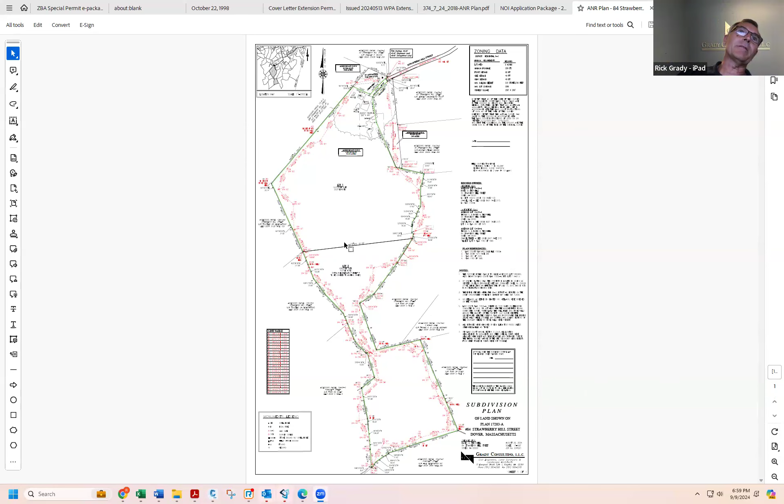Again, Rick Grady from Grady Consulting. This is for Karen Thornhill's property at 84 Strawberry Hill Street. She's got about 42.5 acres here. She would like to convey the back portion of the property to the Hale Reservation. We've been working with Land Court, as well as with Karen and her attorney, on this. Real simply, they want to divide it by this line right across the middle of the property, right here. We'll zoom in a little bit.

The existing house and outbuildings are located towards the front of the property here. That's depicted as Lot 1. There'll be 23.27 acres that will stay with the existing home of the Land Court property, as well as 2 acres of non-registered land that's also part of the same property where the house sits. The total frontage is 95.05 feet on Strawberry Hill Street. Of this, 45.40 is registered, 49.65 is unregistered. There will be no change to the existing frontage; all of the existing frontage will be maintained.

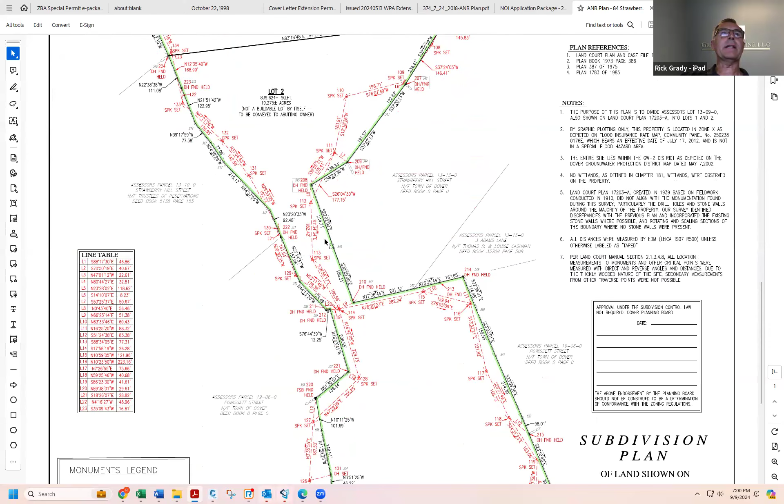The back portion that will be conveyed is about 19.275 acres, shown as Lot 2. It's not a buildable lot by itself, and the only purpose is for conveyance. You will notice the dashed lines here - we had to conduct a full traverse around the perimeter of the property in accordance with Land Court standards. That is meant to depict the measurements that we took around the full perimeter of the property. There's numerous stone walls, drill holes, other monuments around the perimeter, as well as the traverse.

This meeting is being recorded. With that, I'd be glad to answer any questions the board may have.

Okay, thank you very much. We always love to see landowners donating land to one of our open space organizations. So Karen, thank you very much for your donation to Hale. And do we have any questions before I have Jasmine go through the process?

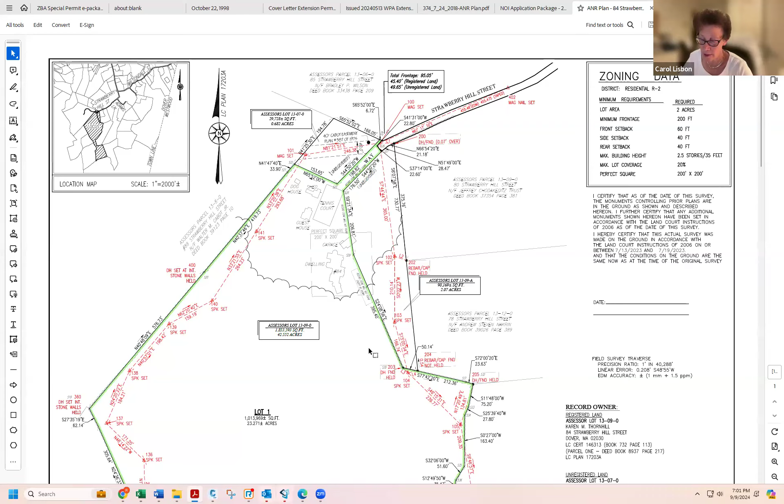That lot will consist of 624,000 square feet - oh, I'm sorry, that's what they're separating out. They will still have over 1 million square feet left on their residential lot, correct - so 1,013,969 square feet. And it meets all the setback requirements, all of the dimensional requirements, except for the frontage.

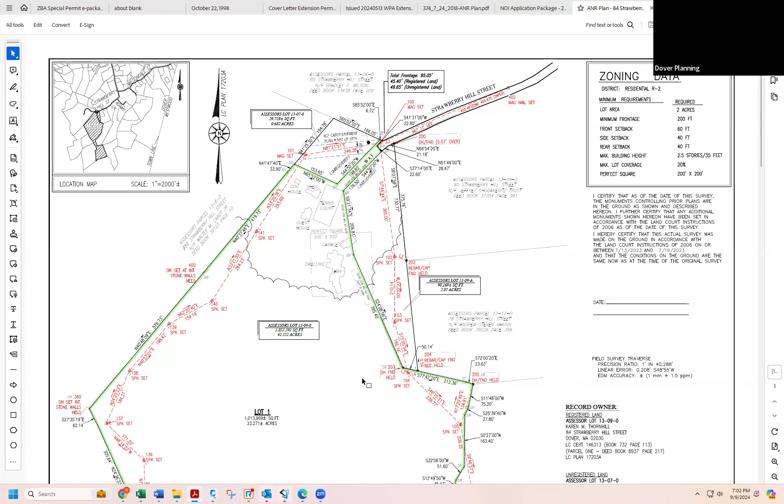The rear lot that they're separating out will be 839,624 square feet, which they will then be transferring to an abutting owner. And there is a note on the plan that says it is not a buildable lot as it is.

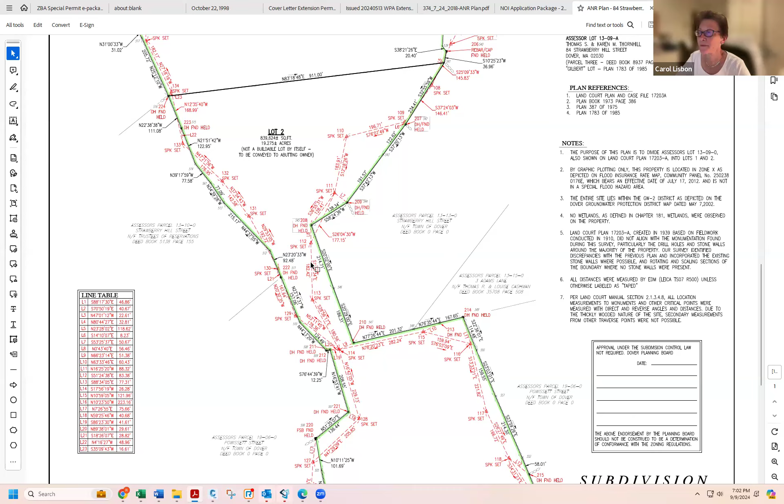Okay, thank you. Do we have any questions from planning board members? I'm sorry, it's been conveyed ahead to Hale, is that right?

Can you please just outline who the abutters are on the portions of the parcel here, please? I guess where's Hale on this? Oh sure, can you see that okay, or do you want me to zoom in a little further? I think I'm good, thank you.

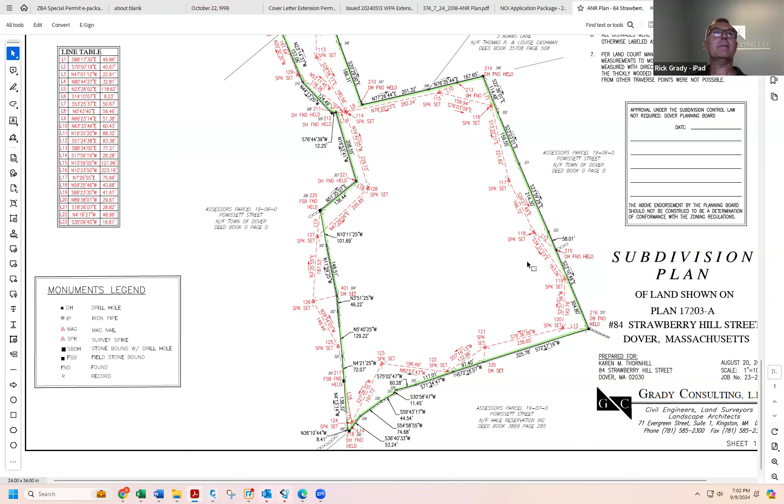Hale Reservation is to the rear here. We've got Town of Dover on both sides here. Cashman's here, although a portion of theirs was conveyed just this past year that we were before the board on. Town of Dover, Trustees of Reservations over on the left here. Trustees of Reservations again on the left here. That Town of Dover property wraps up to here. And then we start getting into the landowners here.

Nakrin at 78 Strawberry Hill. 80 Strawberry Hill Street here. 89 to the left. And 85 somewhat across the street or across the easement here.

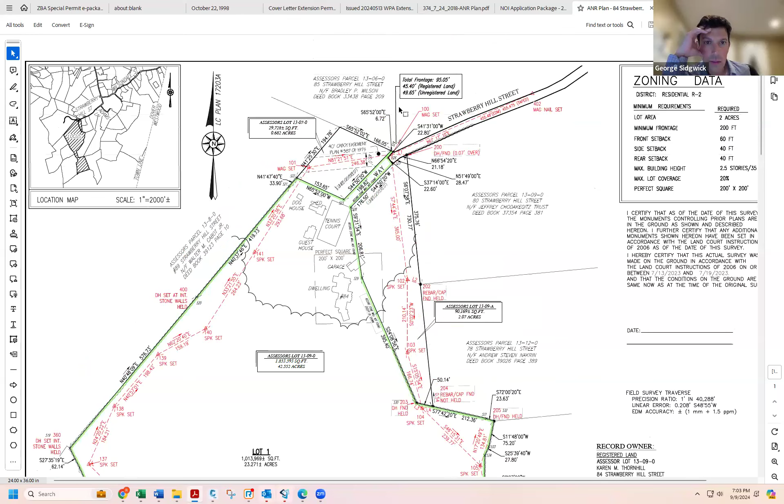Got it, so George, thank you. Back at our first meeting in January of 2024, Mr. Cashman went through with an ANR as well and donated land in this area as well.

Seems familiar, yeah. Do I have any comments or questions from Brad Wilson or Vera abutters? I think I'm all set. Okay, thank you. Vera, are you all set? Okay, not hearing anything from that.

I have one quick question. I just wanted to clarify and make sure that I understand—are there any conservation restrictions or anything like that placed on this land at this time? Or, I mean, technically it could be a buildable lot, but it's not being conveyed as one right now?

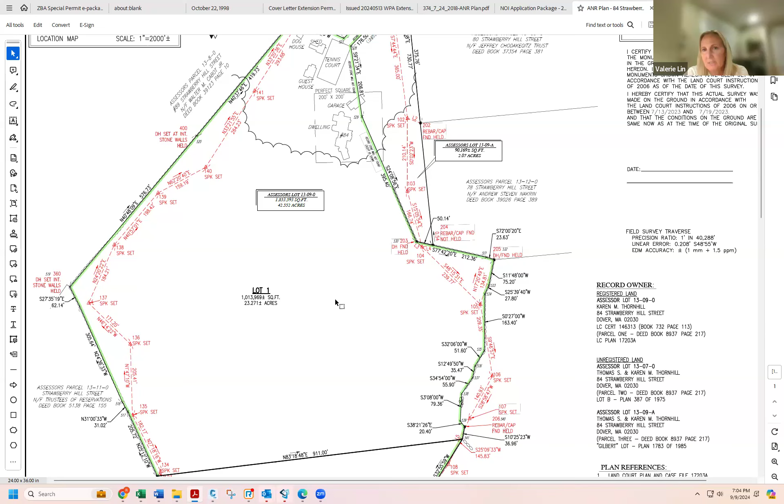Correct, although lot 2 by itself really couldn't be a buildable lot because it wouldn't have frontage. No frontage, right? Yeah, there's no access. No other restrictions on the property currently, though. Okay, thank you.

And as we do, I did have our easement and trail expert, Amy Moot, take a look at that as well. And she obviously feels very appreciative of the Thornhills donation as well.

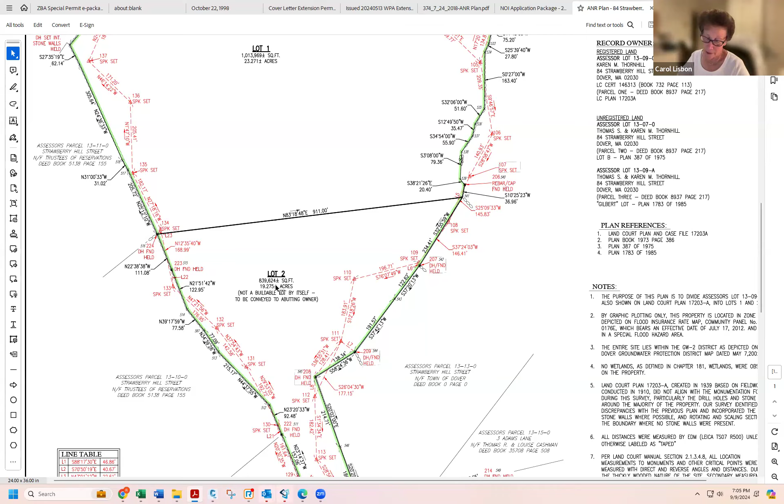So, any further questions? In that case, I make a motion to approve the ANR application for 84 Strawberry Hill Street. Do I hear a second? Second. Great, thank you. I will now take a roll call vote.

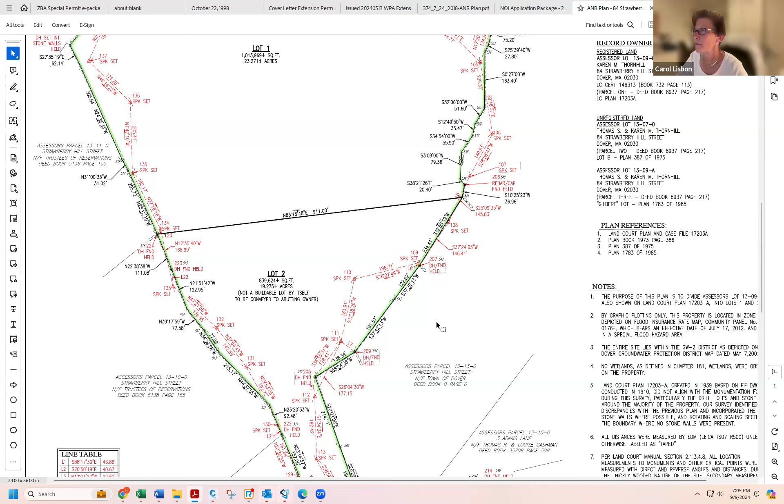Okay, now we'll go on to the second item on our agenda, which is the amendment to the DPW salt shed decision that we had approved earlier this year. And who do we have here for this application?

Good evening, everyone. My name's Jesse O'Donnell. I'm an engineer with Weston and Sampson representing the DPW tonight, specifically Kevin McCabe, the DPW director.

Okay, and is Bobby Tosi on? I don't see him. No, they just left, I don't have him on. Okay. Kevin's out of town, so Bobby was going to, at least as of late morning, was going to fill in. But I think we'll get started.

So Jesse, I'm going to turn it over to you to review. Sure, thank you very much. Let me just get my screen on here. Can everyone see that fine? Yes. Great. All right, so as Ms. Chair outlined, we are looking to request to modify the previously approved site plan approval from May 1st of earlier this year.

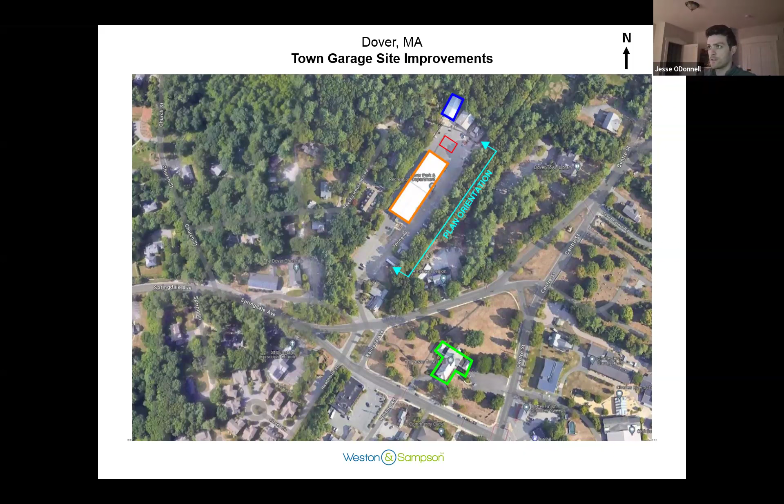I'll go over a few of the features. In orange is the actual double-walled split steel tank, about a 10,000 plus or minus gallon tank with gasoline and diesel fuel for town vehicles. We would have a single-sided vehicle fueling configuration, so vehicles will be pulling up to the left side of that orange rectangle and fueling.

Then we have a concrete fueling pad with bollard protection. The fueling pad that vehicles line up at to fuel will be concrete. We'll have bollards protecting all of the fueling appurtenances so they don't get damaged by any errant circulation by vehicles. We also have a diesel exhaust fluid tote, shown in blue, to house the diesel exhaust fluid needed for some of the town's vehicles.

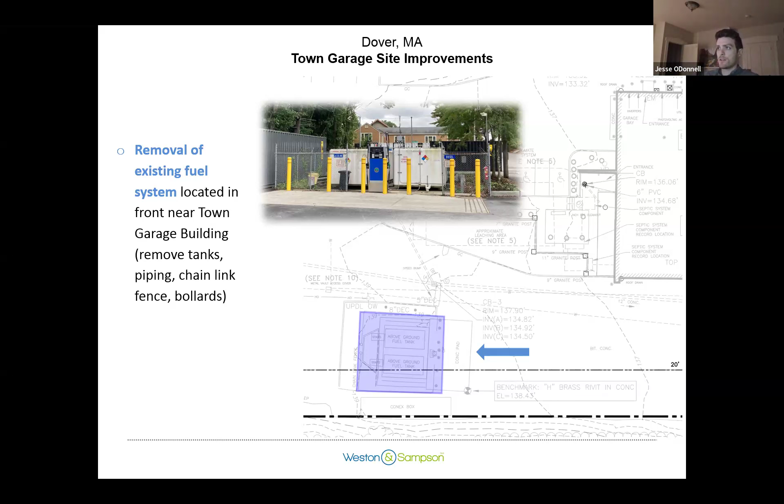Yes, thank you, that's a great question and something I should have mentioned at the start. You're right, this existing fuel system we're looking at here is above ground, and the proposed one is also proposed to be an above ground double wall steel tank with the canopy and the diesel exhaust fluid tote and bollards. So yes, all above ground.

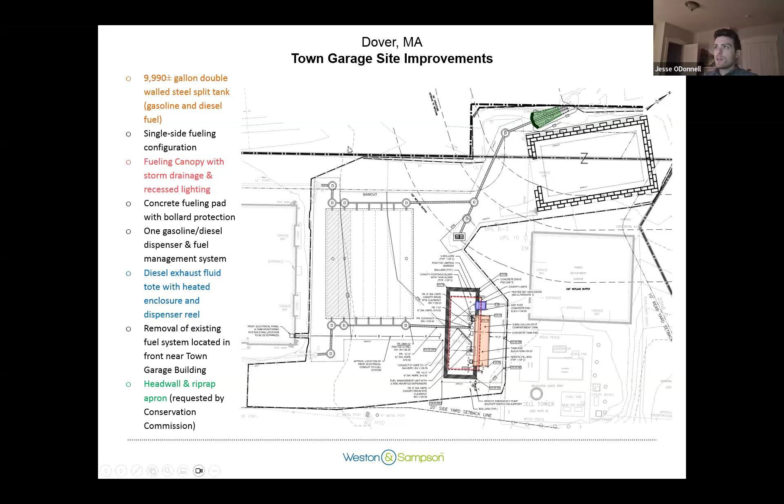And can you remind me why is it that the existing one is being replaced? What's the rationale for this? Is it capacity or something else? That's another good question, and we looked into the warranty.

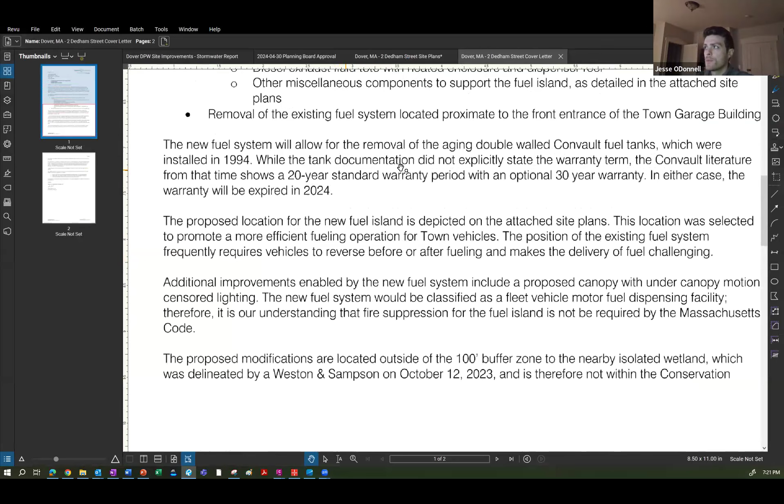Here is the letter that we submitted to the planning board. I think I just want to use the language we use directly in here. This is gonna make you feel old. Come on, I think this is the language we're looking for to answer the question.

So while the tank documentation for the existing tanks did not explicitly state the warranty term, the literature for those existing Convault tanks shows a 20-year warranty period. So in either case, whenever that was established, the warranty will have expired by 2024, because the tanks were installed in 1994.

So does that warranty, did I read that correctly, that it expired? It says an optional 30-year warranty as well? Yeah, so from 1994, there was an optional 30-year warranty. So if it was the 30-year, that would be expiring this year, right?

So, okay. So is the reason why this is all taking place - and Carol, if I'm getting too far afield just tell me if it's outside the purview - but is this because of an age issue that we're replacing this tank? Or is it a capacity issue? Or what's the motive to spend this money?

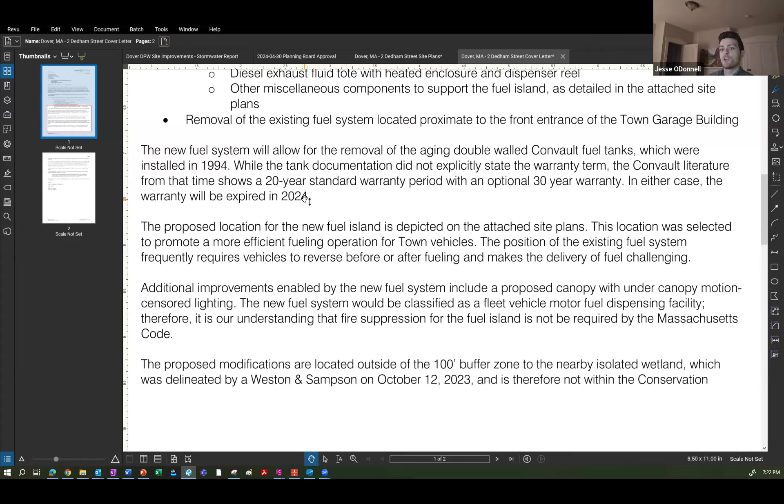Primarily it's an age issue, an age and safety issue. And to supplement that, some of the justification is the configuration and added convenience of the location of the newly proposed fuel system. But the primary reason we're looking to replace this is due to the age.

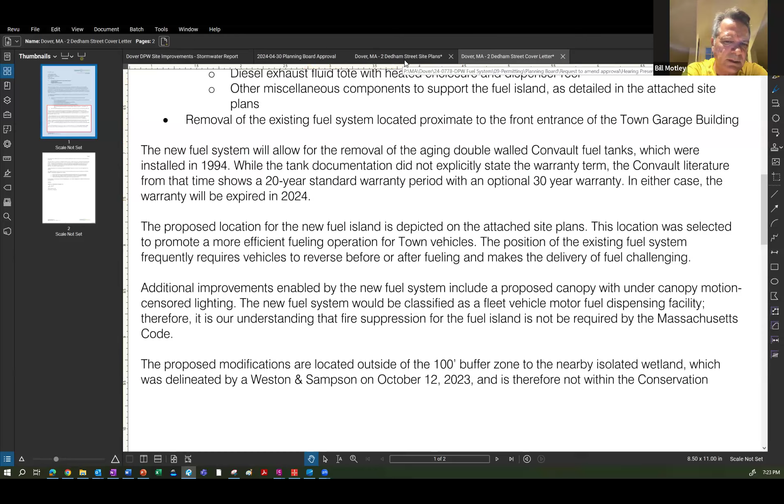And my last question is that the new location just seems to be in and amongst other buildings. In some ways, to bring a big truck into that area where I see the new salt shed and the existing town garage - is that rectangular section to the right of that area above or below ground?

That's a below ground structure? Yeah, that's a really good question. So to get a lay of the land, this is an existing Parks Department garage where they store a lot of their equipment and appurtenances. Right here is a wood fence that houses a cell tower in the middle, this circular icon. There are a few very small concrete structures that serve various uses.

And our proposed fueling system is the area I'm circling right now, kind of in the middle of this open paved area. So vehicles generally would come in from the front along the right side of the main DPW building and pull up right here. Then they could either leave by doing a 180 and coming from where they left, or pull out straight and leave via the northerly side of the plant.

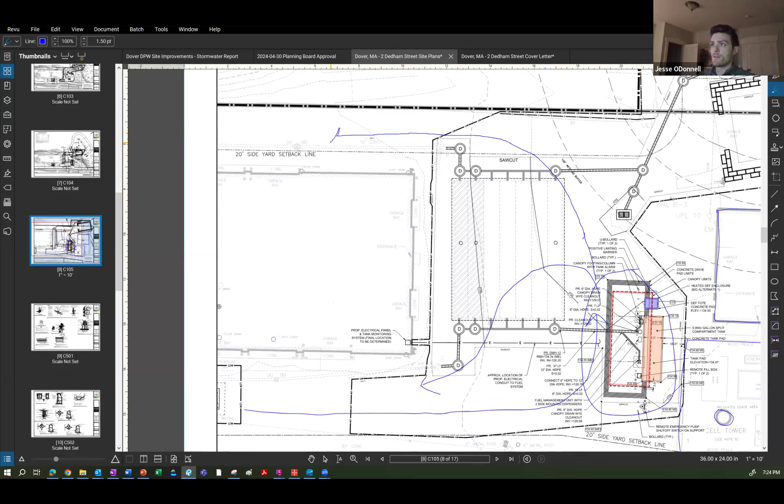Okay, and that canopy area you were alluding to, could you tell me one more time where the canopy area is? Yeah, the canopy is what's in red here. The tank is in orange, the canopy is in red, and the limits of the concrete pad are generally what I'm highlighting in green right now.

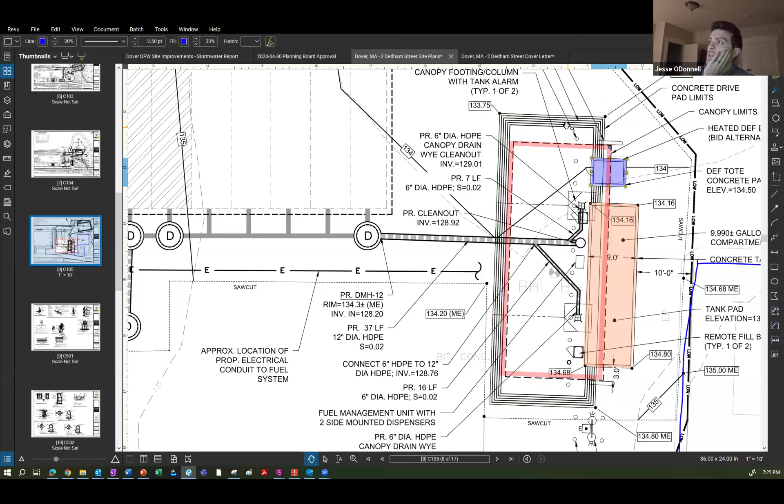What is the capacity of fuel between diesel and regular gas for the new tank compared to the existing tank? I believe the new tank has about a 60-40 split for regular fuel to diesel. For the existing tank I'm not exactly sure what that split was. We did a feasibility report for the DPW at the start of this project and probably have that information there - if you'd like, I could take a few minutes to access it.

I'm primarily interested in just knowing, are we increasing the capacity of fuel storage with this new tank? Obviously age is a consideration for replacing the old one, but what are the capacities of the existing versus the new?

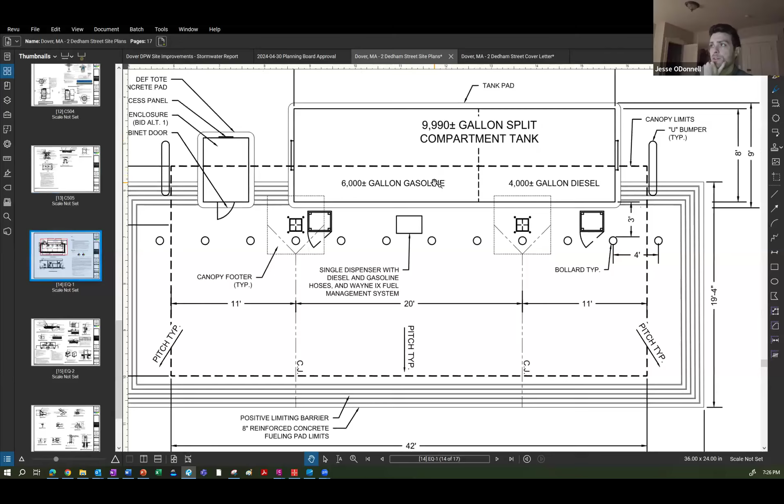Let me see if we have that on our plan. Our industrial engineers designed the equipment plans here. So to answer your question about the new tanks, it's 6,000 gallons of gasoline, 4,000 gallons of diesel. As for the existing, if you bear with me, I could open up our feasibility report and it will likely have that information so we can compare.

Jasmine, could you just double check to make sure Bobby isn't waiting? There's no one in the waiting room. Okay, okay, yeah, okie doke. Maybe I'll text him.

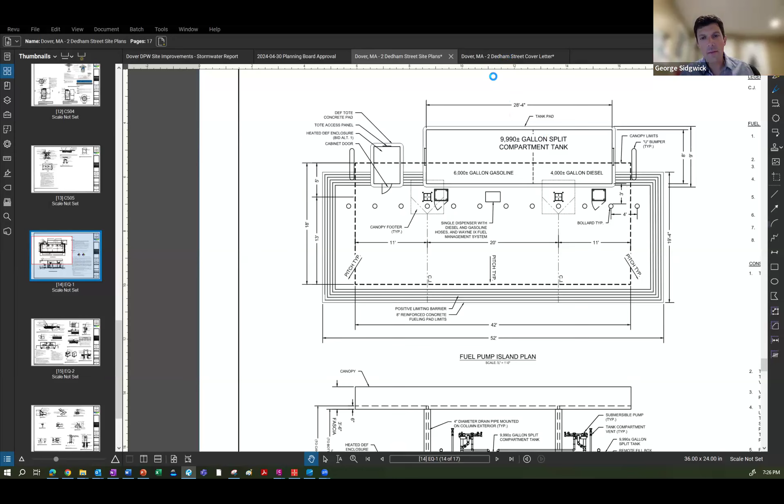Well, Jesse's looking. George, did you have some questions as well? No, Bill hit mine. My main one was around capacity differential between the existing and the new one, and sort of what that means.

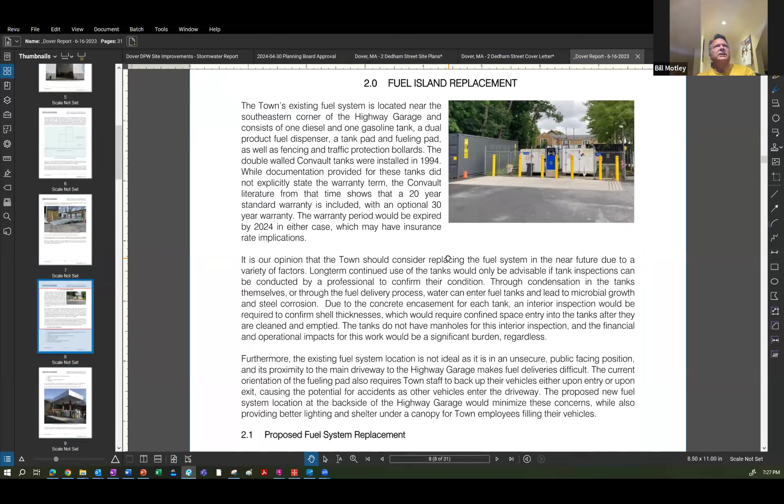And Carol, are you not aware of the cost of building this new fuel system? Was this something that wasn't brought before the town meeting? So do we not know how this has been funded either? As Jesse said, the other funds were ARPA.

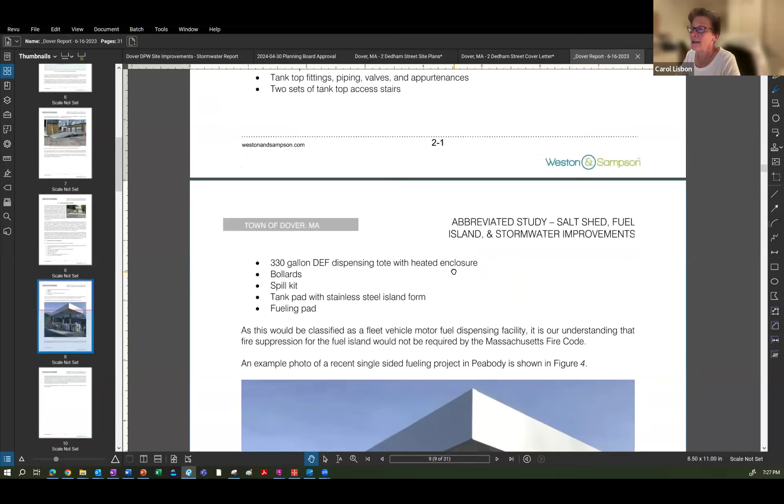I happened to be in the office with Jasmine today when Bobby Tosi stopped by, and he was going to be signing on tonight. I asked him if he could answer my two questions, so it's unfortunate he's not here. I just texted his cell phone, so I don't know - maybe he's been called out on a fire or an EMT call.

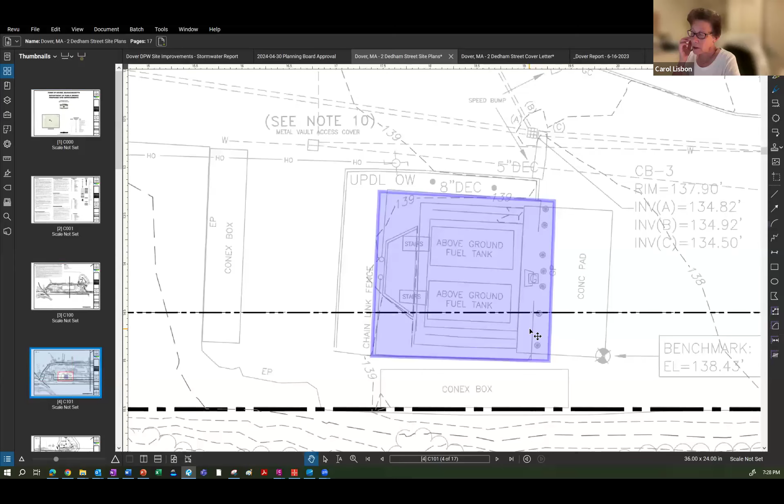Okay, but if they're not using ARPA funds, meaning they had some left over - the ARPA funds have been designated for usage by the Board of Selectmen over the last couple of years. I see, okay, so there might be ARPA funds left to do this. It wasn't on the capital budget, I don't believe, for this year, so it might be that he just has money. Well, it would have had to be ARPA funds because the cost of this is obviously more than $10,000, so if he was going to do this, it would have had to be a capital budget item. Yeah, and it wasn't.

Kevin has been spending the time since he came on board to the town of Dover upgrading all the equipment and buildings and everything else. But I too was curious about the cost, and I just don't know. I'm assuming that Mike Blanchard, Kevin's boss and our town administrator, knows what Kevin is doing with this.

And to your point before, it's not something we legally have as part of our decision-making process, but I think as we did with the last A&R application, asking what are you doing with lot 2, it's nice for us to see the whole picture.

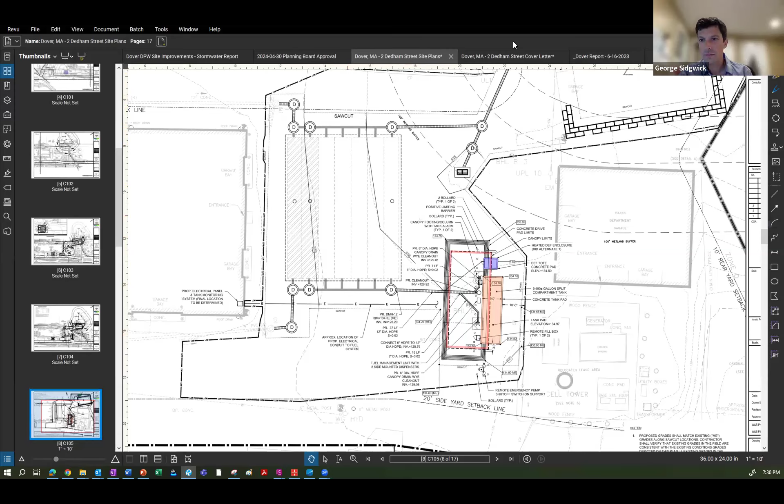No, thanks, it's just an interesting one to me — you could have a tank as big as you'd like on your own home and not need it, but you do if it's public, I guess. Well, it's interesting, right? Because 10,000 gallons is still 10,000 gallons, and who cares who's using it?

I apologize, Carol, but Jesse, I assume there's some sort of retaining wall around this fuel storage. He may have touched upon that and I just missed it in his overview, but I assume that's the case.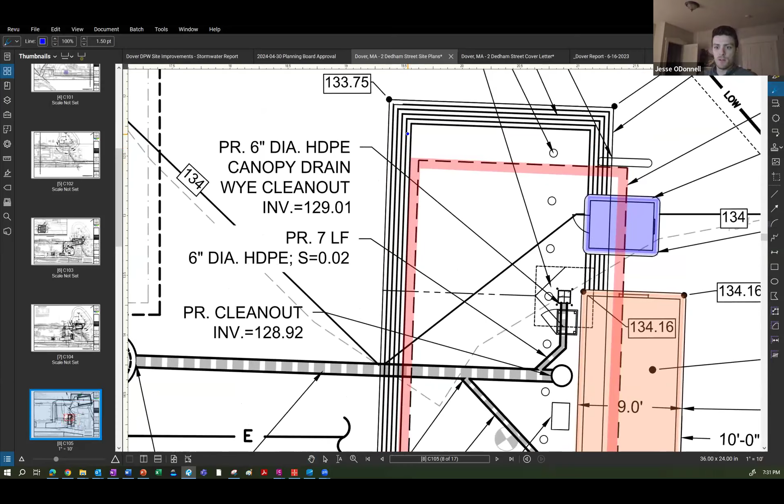Yes, the tanks are double walled — that second steel wall is a containment wall in the event of any spills. Then a second layer of added defense are these positive limiting barriers, which are all these grooves in the concrete that you'd see at a typical fueling station, indicated by these lines here.

That gives some additional surface area to contain fuel. I'd like to go back to the bigger picture of the lot, the whole site — the cell tower, down in the bottom right, requires maintenance. We have an expectation that shortly we'll be getting an application for more carrier involvement there, so I want to make sure someone has taken a look at access to that compound with the fence.

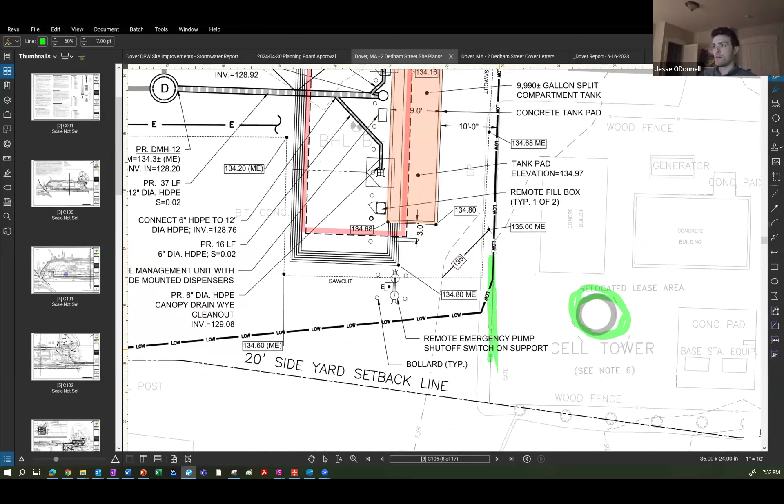Yeah, we had a call with Kevin a few weeks ago to identify where the gate is for this enclosure, which is on the planned southerly side of this. We also made sure to maintain a 10-foot dimension between the edge of our tank pad and the fence, for any vehicles should they need it for plowing or other access purposes to get around the back of this. So that's the layout we've considered with respect to those items.

So Jesse, do you know when they come to the cell tower to do work, where do they park their trucks? I've walked through that area before and they tend to park along that front fence line where the planned fuel tank is. So I'm curious, is there still room for them to park anywhere?

I'm not sure about the operations or logistics, but if they park along this area, there's enough room for any vehicle, though not enough room for two vehicles side by side. So if a vehicle was maintaining infrastructure inside the cell tower area and parked where I'm indicating in green, they'd be restricting access through this pathway while parked. Those trucks tend to be like the larger equipment trucks you'd see for Verizon.

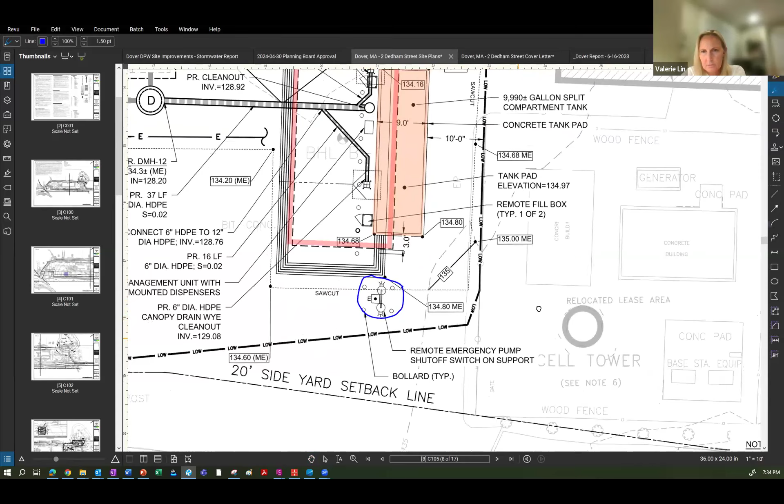It looks like there's a remote emergency pump shutoff switch just in front of where you said one of the openings to the cell tower area is. Correct, yeah, just surrounded by a few bollards. These circles surrounding it are 4 bollards.

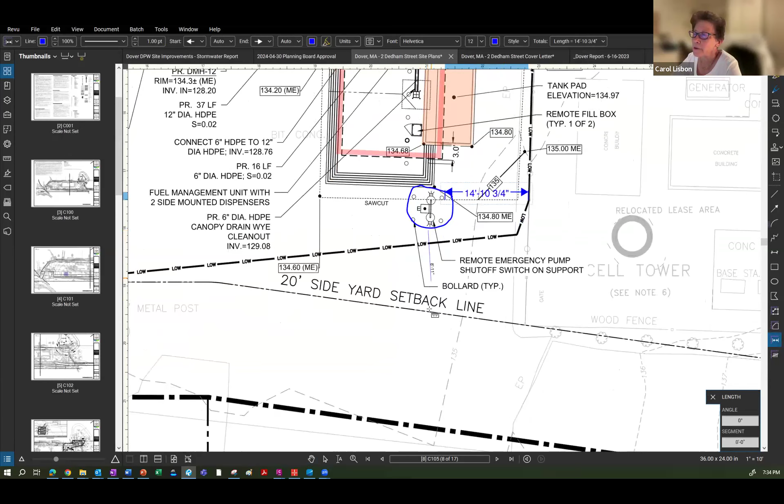So if they were going to park in that area, if you're facing it, it would be the south area. If you're a big truck coming in from the left, and for some reason you need to get to the northern part but can't go between, whether it's snow or whatever, between the back of the garage and the top of the canopy area, and you were going to go around the back of the fuel tank, and you've got this shutoff switch there—where do you go? North of the shutoff switch or south of it to come around?

Let me see if I can answer that by illustrating here. This area I'm highlighting in green—outside of it is all open pavement, open for vehicles to traverse throughout the site. So if someone wanted to drive in here, they could drive up and work their way through as I'm showing. The tightest portion is this 10-foot dimension right here, that's the bottleneck, but everywhere else there's much more space for vehicles to maneuver around the site.

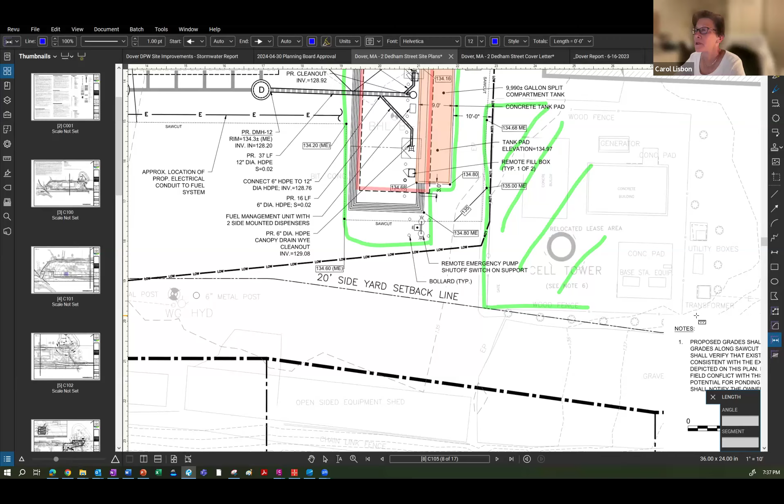Jesse, I'm putting you on the spot since no one from DPW is here, but do you feel that in your conversations with Kevin, the issues we've raised have been considered and that this design is sufficient? I do, yeah. And with respect to the funding, it does appear Kevin's had conversations, and I think we'd be quickly able to answer that question.

With respect to that, I jotted down a few questions. Mr. Motley had a good question about whether there's an increase, decrease, or stagnation in capacity relative to the existing tanks—we could find the size of these existing tanks to answer that in short order. Regarding electric or fire code issues, what size tank would necessitate fire protection, or if that's even a variable that does, we could answer that too. We've done our due diligence to site this fuel system in a way that works with the site and local regulations, but we can answer these more precise questions once Kevin returns this week.

Jesse, I have a couple more questions. The canopy—how high is it? And have you measured the height of the largest truck DPW has to ensure it will fit under there? And if they purchase a taller truck in the future, will that be okay? Great question, let me go to the plan that shows the canopy detailing here.

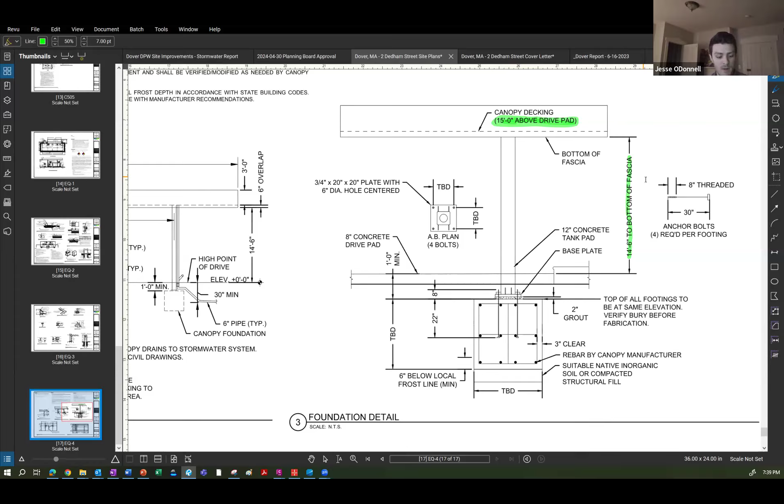Yeah, I asked because in the past there were renovations done to the firehouse, and shortly after those renovations they purchased a new truck which did not fit through the doors with enough space to safely get it in and out. So then they had to make more renovations. That was a fun meeting. Yeah, wow. So we'll certainly talk about that. I'll bring this up to Kevin.

I'm also thinking a lot of those trucks haul things, right? So sometimes the things they're hauling might stick up higher than the height of the truck itself, so we need to make sure there's some excess space above them. Secondly, if there were to be a spill, I know Bill you started questioning this...

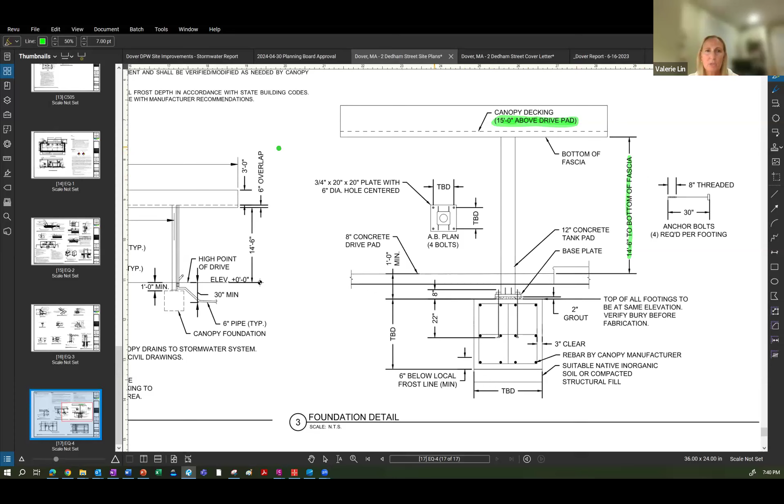If there were to be a spill, can you go back to the original plan we're looking at? What is the flow of where the gasoline would flow to? Yes, let's go over that.

It's a good question, and it kind of marries up with the stormwater design for the site. So the tank is in orange. If there were to be a spill in the tank, let's go from the most remote point of the tank relative to our stormwater infrastructure.

If there was a puncture, in the almost near impossible event that something would puncture both walls and water were to flow out from this location in green, it would follow a flow path like this. It would flow this way, and then it would eventually start to flow this way, into this new double grated catch basin, and then through this water quality treatment structure, which has been sized to remove pollutants and impurities in stormwater and any sort of spills before discharge to the wetlands.

I don't think it would remove gasoline though, that pathway. Yeah, that's a good point. These treatment units are mainly for physical debris, deposit of sediment and materials like that. The gasoline itself, I don't think they're rated to have any appreciable removal of gasoline.

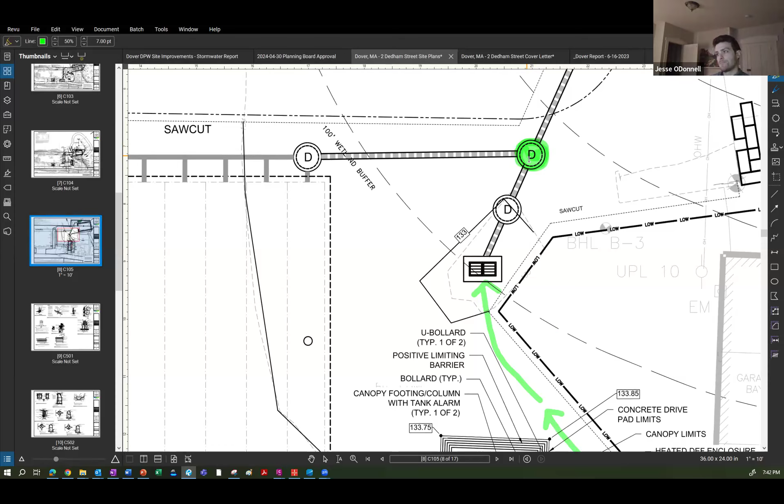But there is a sump in this catch basin, so there are some features that would help in the event of a spill. But in the event of a spill, we would need to certainly conform to any spill response procedures that are part of our plan.

The spill that happened in Dover was not that anything was punctured. It was that gas tanks were being refilled by a big tanker, and the gas spilled out during that filling process. So that's why I'm asking, where on here would a tanker drive up to fill these tanks, where do they fill them?

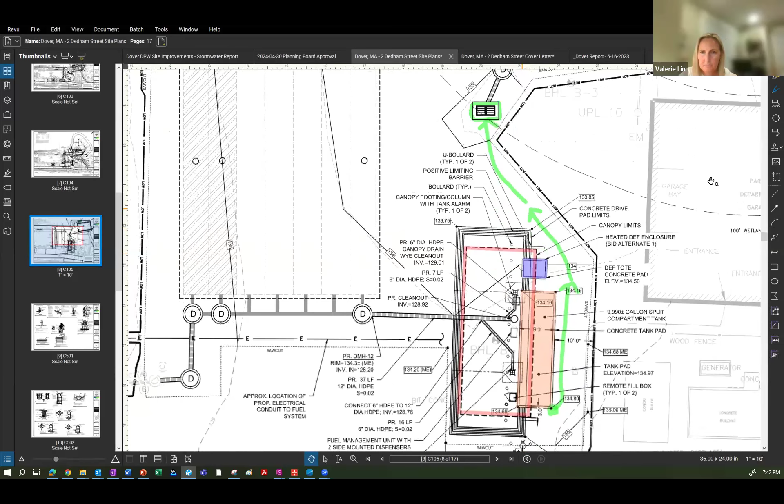Yes, so let's see, a tanker would fill up right here. The dispenser, I'm marking the dispenser right now. So they would fuel up at the dispenser right there and park right alongside the bollards right here. Okay.

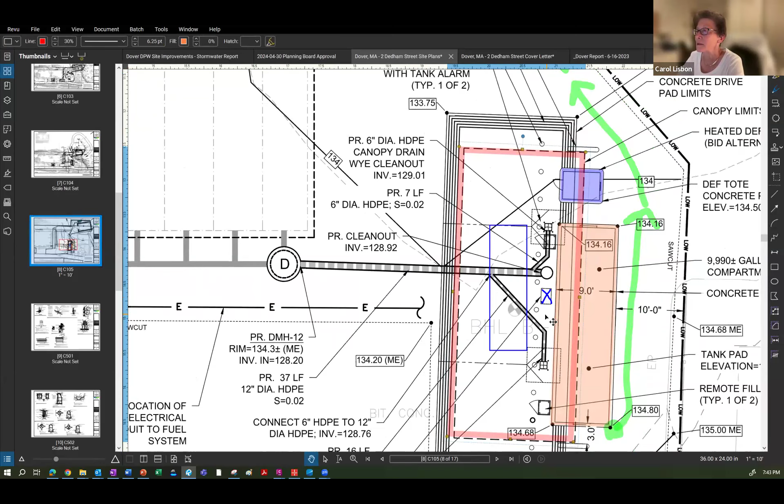Jesse, when this was reviewed with the Conservation Commission, was there any discussion from the Commission about this whole issue of the oil spill and the stormwater plan not having filters that impact gasoline? This project, this amendment or modification, is outside of the conservation jurisdiction. So this improvement is not something that is within the conservation's jurisdiction.

So from a stormwater perspective or a spill response perspective, I'd invite any commentary or feedback that you may have. At which point does the DEP get involved with these types of facilities or approvals?

They certainly do, and I think there's certain size triggers. I am not familiar with the DEP code as it relates to these more industrial components. My expertise is more in site civil layout and engineering of utilities, not specifically fueling systems. We have staff at Weston and Sampson who have assisted with this project that would be able to answer that question. Let me jot that down, and I can follow up to provide an answer. Thanks.

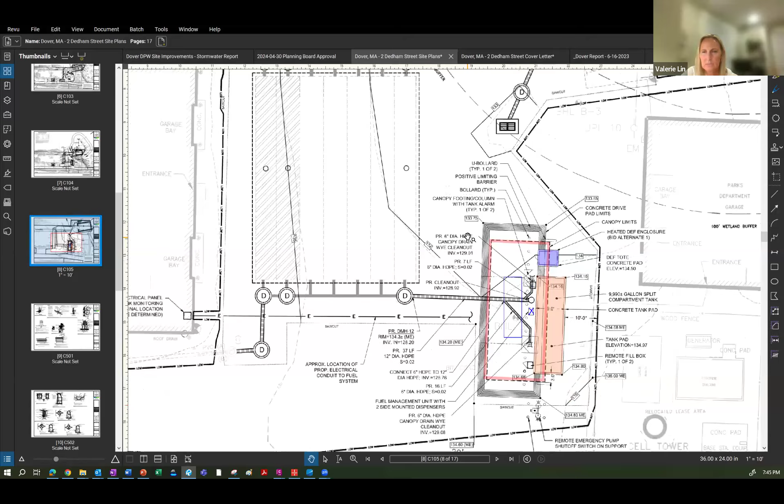And one other question, which you might have on here, maybe I just missed it, but there's also a water protection zone in that area, I believe. I don't know if you were to zoom out, if you're able to see where that zone is. It would be behind the cell tower, and behind the salt shed, I think. Yeah, there is a wetland adjacent to the salt shed. Let me highlight the edge of the wetland, generally as I'm highlighting in green, and it's an expansive wetland that goes back to the rear portion of the site. So that's where the wetland system is. Is that what you're referring to?

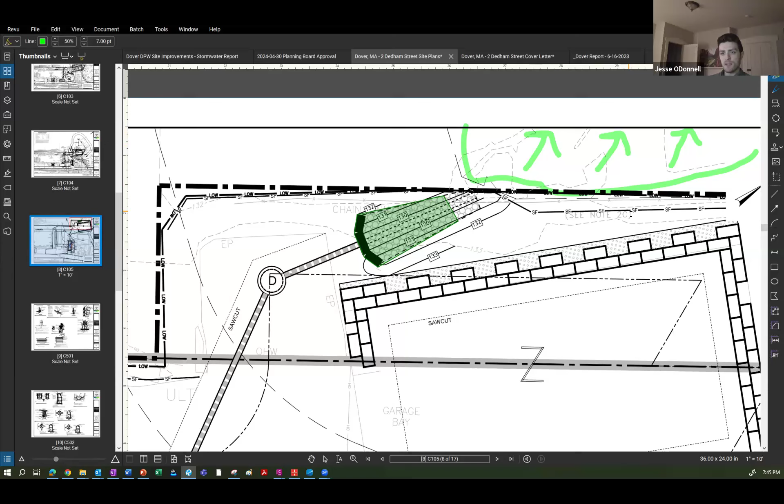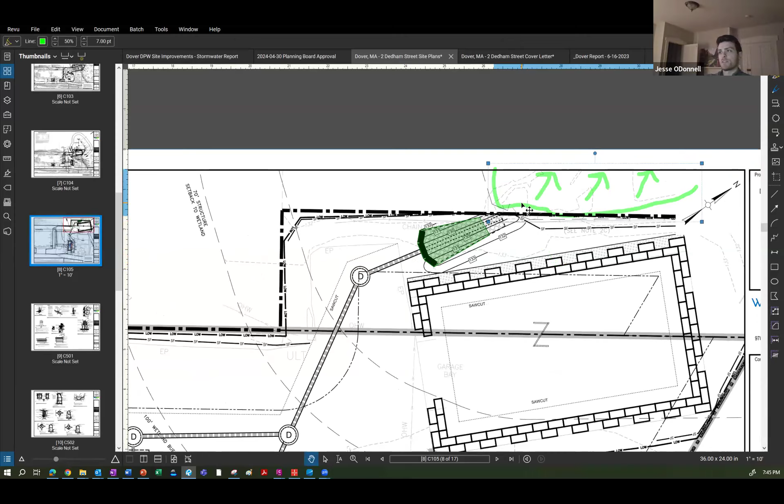Yeah, I think there's also a water protection area back there as well, in addition to it being wetlands, a drinking water protection area. I just don't know how far from this location it is. As far as I'm aware, this whole site and all the properties around it are in the Groundwater 1 protection district. It encompasses a massive portion of the town, and this property and all the properties surrounding it are part of that groundwater protection district.

But what I think I'm hearing here, which is raising some skepticism on my behalf, is that because I believe this is the town garage, what I'm hearing from you is that the guidelines and regulations that might affect, for example, a private residence, this property is exempt from some of those regulations. Am I hearing that correctly?

I'm honestly not sure the answer to that question, how this would marry up or be compared to a private residence if something private were proposed. I think it was commercial, Bill. Yeah, I think it was commercial. If it's commercial, then there's at least fire suppression requirements, but if it's not commercial, then there aren't, and this technically isn't commercial. That was with regard to the fire suppression.

Right, but I was going to the comment that was made earlier, not about the fire suppression, but with respect to the flow of fuel. Val had asked a question about whether there was any way to retain any spilled fuel. I thought I heard that conservation requirements were exempted for this property on another matter. Am I mistaken?

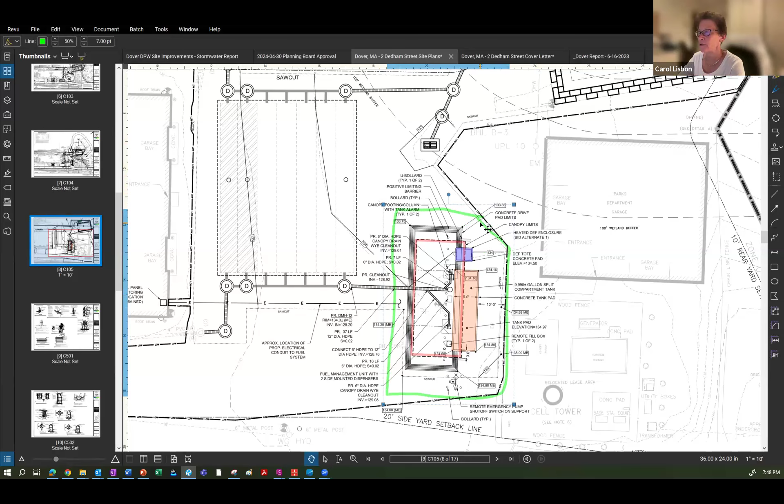Okay, but to your point, Bill, it doesn't change a common sense question of if it's 100 feet outside of the zone. Only because, and I'm particularly nervous, it flows right in the direction of wetlands. So I guess it begs the question that if there were a catastrophic situation where a big truck backed into it and it did create a leak, what is to say what's going to retain it? There's nothing that doesn't sound like it's going to retain the fuel other than a double walled system.

And that may just be industry standard. If it is, please tell us so. But it does beg the question, and obviously this is the time to ask. I think it's a very valid concern. It is the industry standard, so we are conforming to standards here.

We can discuss with Kevin and with our industrial engineering staff to see if there's a third or fourth layer of added protection that we could try to implement here, but this is the industry standard as far as I'm aware. But it does flow, as you indicated, in the direction of the wetlands. Yes. So any sort of spill would be caught by the stormwater management system and then piped eventually to the wetlands.

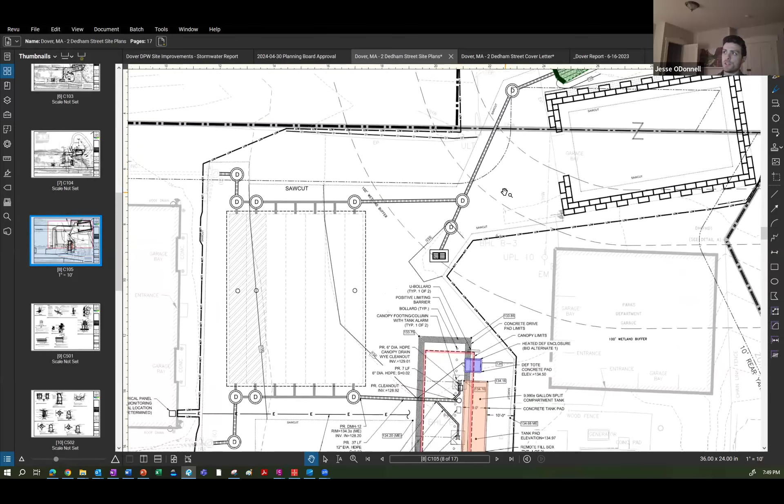I see. Okay, so this didn't really come up in front of Concom for the reasons we discussed earlier, that it's outside the 100-foot buffer zone. Right. But Jesse, I'm sorry, go ahead, Val. It looks like there's also drainage pipes in the front of the system, correct? It looks like a clean out.

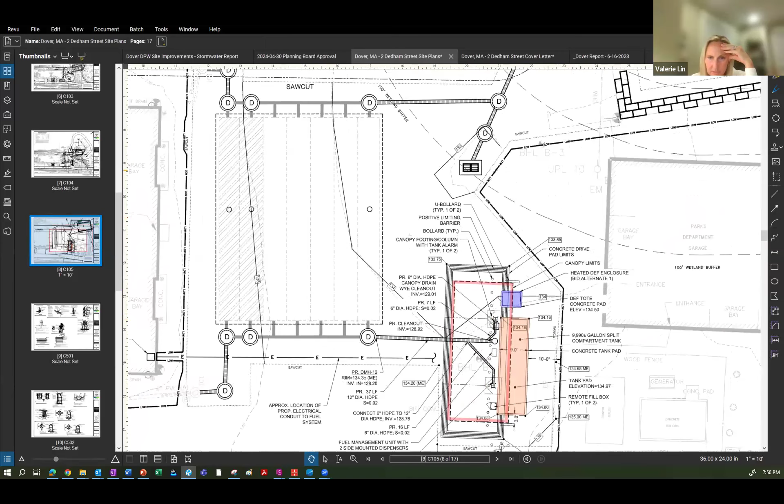So the red canopy is connected to this pipe, which flows into this manhole structure here and into this larger chamber system. So that's more for stormwater. Correct.

So it appears that we have some questions about the impact of the design should there be a catastrophic leak, recognizing that we have experienced that in Dover, and it was a catastrophic impact to many residents in town and continues to be.

And quite frankly, I just have some concerns about the general flow of lots of large trucks and equipment getting around that area where there are now tanks in the middle of what would normally be a large open area for driving, especially when I think about winter and if we ever get back to 10 feet of snow and those types of issues.

Do you have, is this something that you're planning on building while you're there doing the stormwater? What's your timeline for this? I'm sorry, I think I went out for about 4 seconds there. Could you repeat the question? What is your timeline for building this? Is it while you're on site doing the stormwater work?

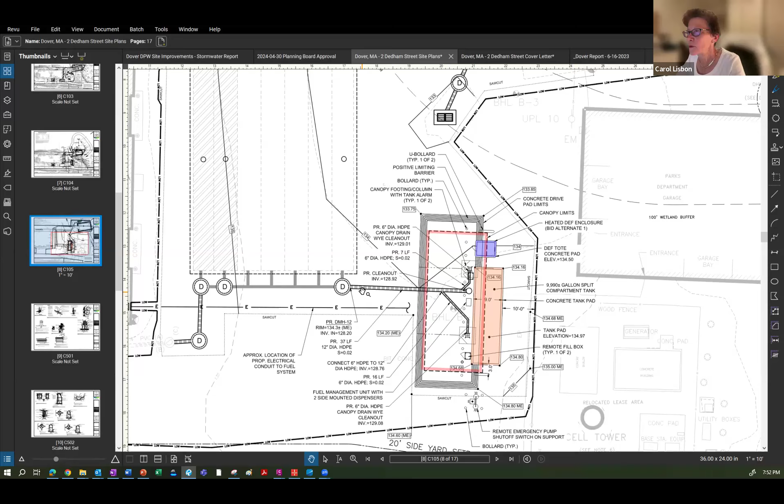Yeah, because the timeline for the overall site improvements here is that the salt shed is currently in the process of being constructed. The stormwater improvements will likely occur early next year in the spring, once the salt shed is done and the snow has melted. Then we would look to do the fuel system after that. We are looking to go out to bid with all of the stormwater improvements imminently to get those ARPA funds realized and allocated, and then this would occur after that. So sometime in the middle to later part of 2025 is the idea. I would like to defer to Kevin just to confirm that though.

Okay, well, given all that, it would be my recommendation that we request to review this again when Kevin is here, and give you a chance, Jesse, to answer some of these questions. How does that fly with everybody? I agree.

I agree, and I'm sorry we go through so many of these, but Jesse, when we originally were approving the salt shed, was the plan at that conversation that eventually you would be coming back to us for this approval of the fuel shed or fuel facility, or is this more of a later concept that came up with the building department to add? We always had the intention to propose a new fuel system on the site to replace the existing one. That was part of our feasibility study that we started with the DPW more than a year ago.

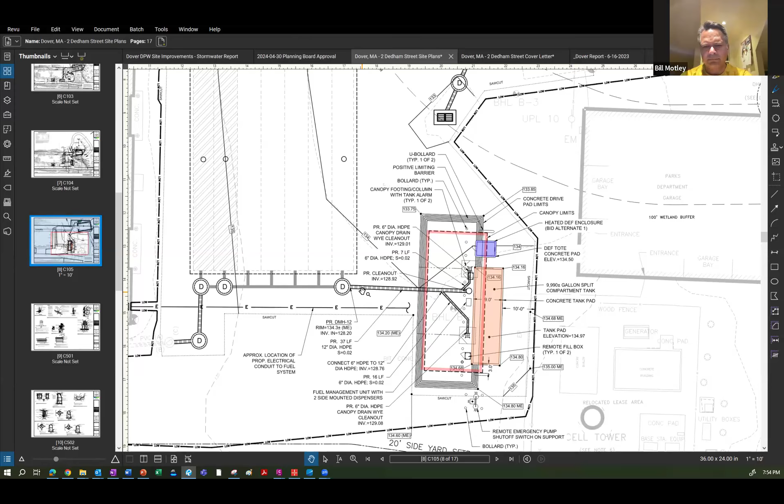Are there any other questions to be posed to Jesse so he can do his research prior to another meeting we might have with Weston and Sampson with Kevin in attendance? No, and if I may, I'll coordinate with Jasmine. I'll jot down all the questions that I've written and email them to Jasmine, and Jasmine, if you'd like to confirm with me, we can get all of those aligned so that we can start to answer all of them in the coming weeks. That would be great. Sounds good.

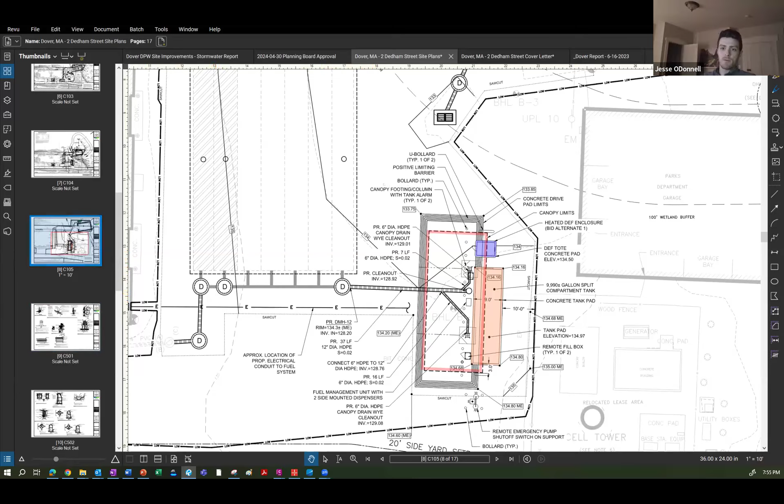Okay. Great discussion. Thank you all for that in-depth review.

Yeah, I mean, interesting. It's probably something the town needs, but it seemed like there was a lot unknown about that. I remember the conversation about the salt shed, but this topic relative to the fuel obviously invites a lot of questions. I didn't recall this being part of the agenda when they first came to us. No, I think it may have been something Kevin was discussing with Weston and Sampson, but it wasn't discussed with us.

But is this also something the highway department might be coming to town vote on in the spring, seeking approval? It's not going to be on the taxpayers, to our knowledge. Well, I don't know where the funding is coming from. From a municipal law standpoint, you cannot go out to bid without having the funds already approved. So if they wanted to do this with capital budget funds or bonding funds, they would have to go to town meeting first, and come to us previously.

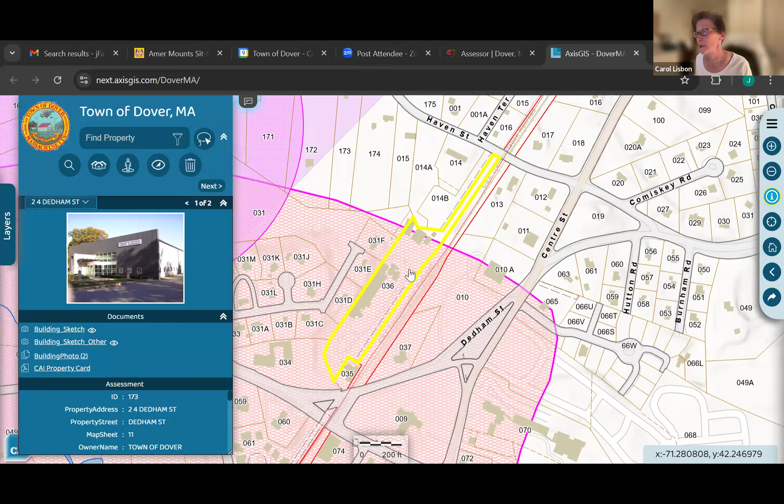Well, the tank may be outside of the 100-foot buffer, but the area that the oil or gas would go into is within it, right? Yeah, it's a bit silly, right? If the lay of the land runs right into the wetland, it doesn't really matter that the source of the fuel is another 10 feet away or something. Correct, right.

Okay. Great discussion, folks. Thank you. Let us go to the next agenda item, which is a discussion of the Board of Selectmen's fiscal year 25 initiatives and goals.

So this was included in your package. This is the third or fourth year, I think, that they've been doing this, where they issue these goals, some of which young eyes can read and some which old eyes cannot. Sorry, I tried to get it to fit all on the screen.

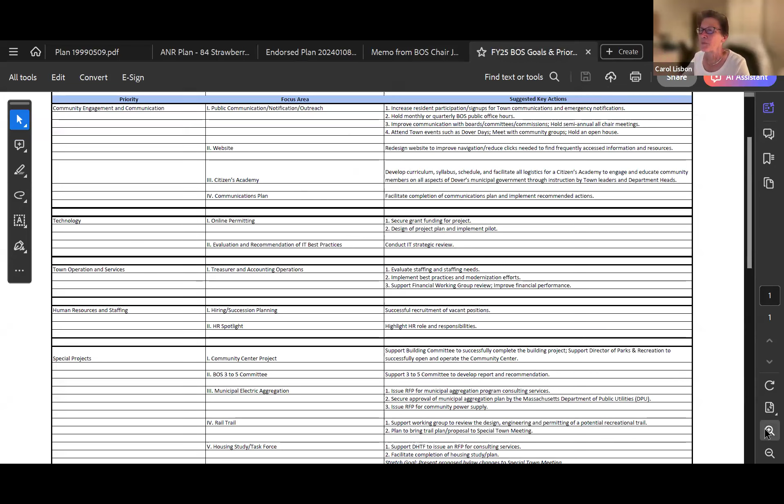While we've got it all on the screen, are there any comments? Let's start at the top. So we don't need to get the whole thing on the screen. Are there any comments about the priorities, focus areas, and key actions for the community engagement and communication items that they list?

I will say that we have done a lot of work on the planning board website, and it has been enhanced significantly by some great web pages on housing, 40B, and the MBTA Community Act. Jasmine has been working with Chris to ensure that's all up to date, and I think at this point we're pretty pleased with the way our part of the website looks. The rest of the boards and committees have a lot of work to do, but the tree committee work that Val and her committee did is very well positioned on the website.

So any comments on that first grouping of actions? No? Okay, technology - online permitting. Jasmine, when you draft our response, I think we should strongly support the online permitting focus area and urge that it get done as soon as possible. Make it a high priority.

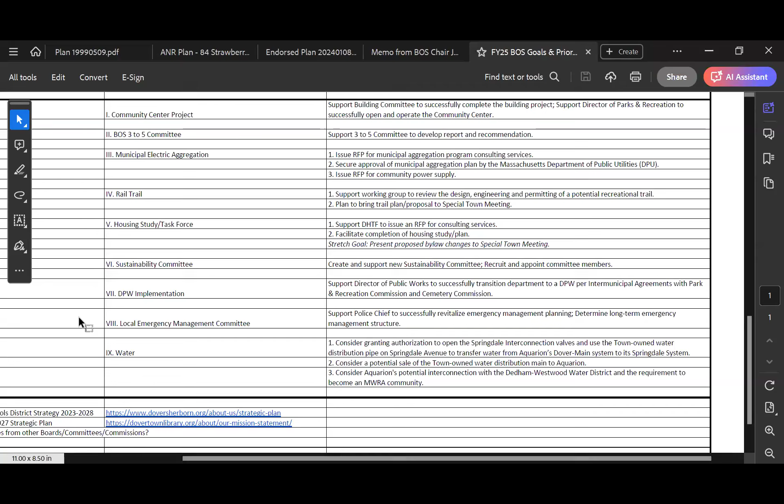Will do. Sorry, Carol, just while there's a pause - Kevin McCabe posted the housing consultant RFP on COMMBUYS last Thursday, so it's already made its round in the newspaper. It's on COMMBUYS, and the deadline for submittals is October 1st by noon. So by mid-October, we will have made a decision, assuming we have qualified responses. Great, thank you.

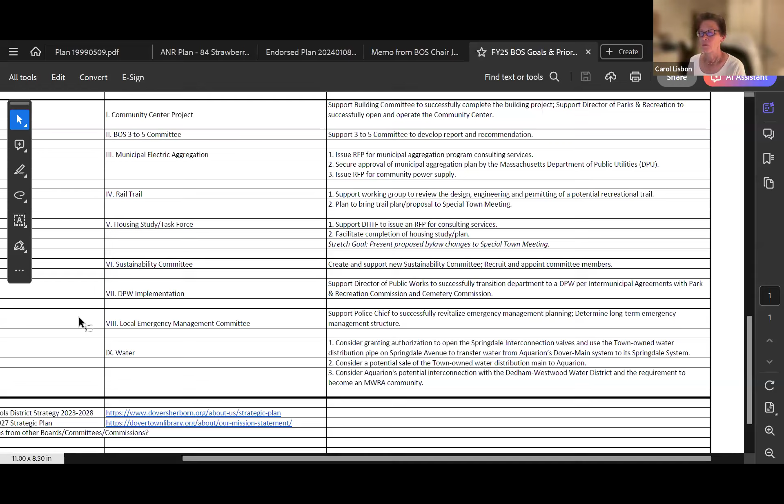Anything else on the selectmen's list here?

Okay Jasmine, I know you were looking at something else while we were talking, so George is going to get you some comments relative to the water initiative, and how it relates to maybe pulling it in under the sustainability committee.

The charge of the sustainability committee was worked through the housing task force, only because there were a bunch of us that know the town on the housing task force, so Robin asked us all to look at it. So it does fit very well into the housing task force, the sustainability charge, which the selectmen will be reviewing at their next meeting or within the next two meetings. So we should make that point.

Absolutely, I'll make sure that gets in the memo. Great, thank you.

Yeah, I'll take a look at the draft when you're done. I think it's due sometime like on the 16th or 17th or something, wherever that cover memo was. Yes, let me see, it's right here. It's due... Thursday? This Thursday? Thursday the 12th. So I'll get it to you tomorrow. Before you go to bed tonight, George. Well, all right.